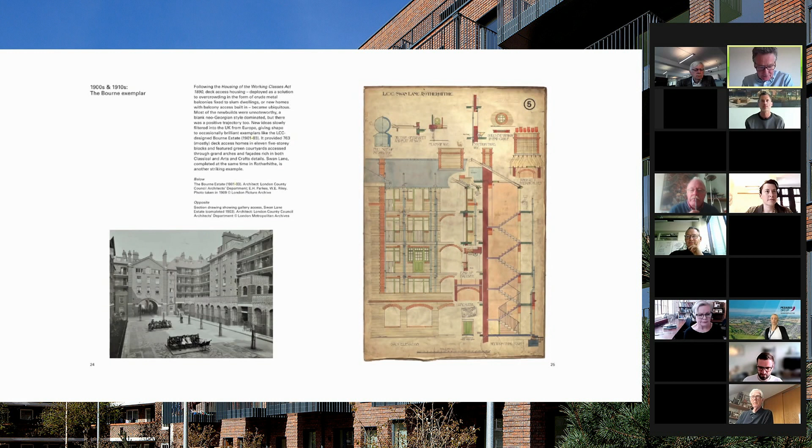Again, top left, you've got J.J. Burnet's housing for the Glasgow Workmen's Dwelling Company on Rotten Row in 1892. And then this is the Bourne estate. That's going to come up later as one of our modern case studies, but here's the original Bourne estate. Again, most of you will know it if you're in London, and very easy and a great pleasure to visit. One of the most celebrated deck access schemes from the early 20th century. And on the right, you've got another of those, Swan Lane Estate in Rotherhithe, this beautiful construction drawing of it.

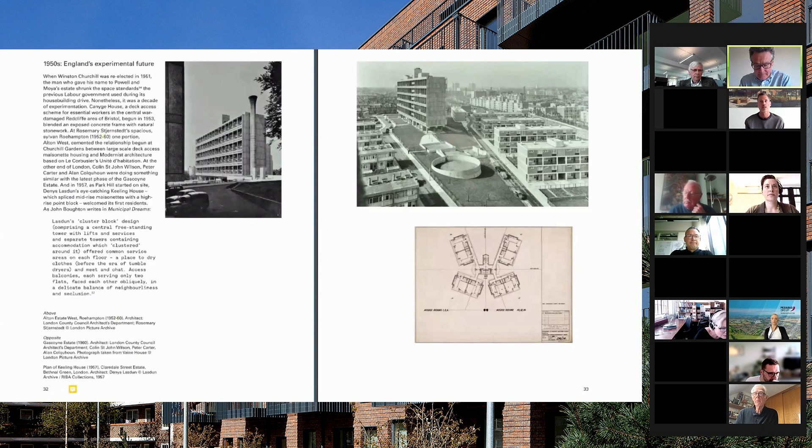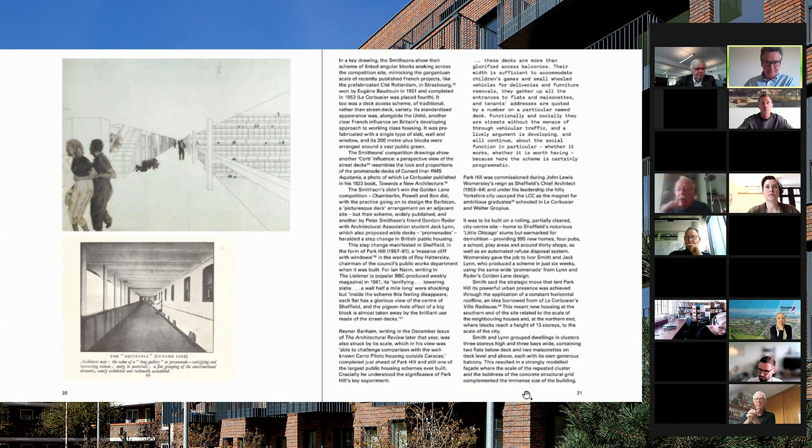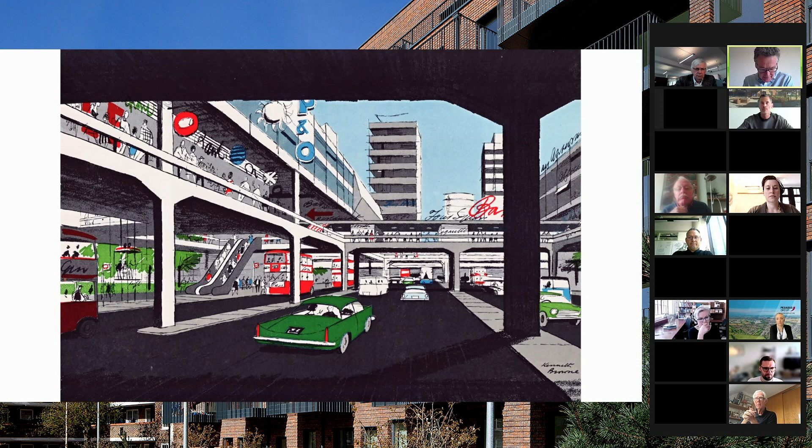And this is from Colin Buchanan's very influential 1963 government report, Traffic in Towns, which was reprinted as a Penguin paperback. So hugely important in shaping Britain's towns and cities in the post-war period by advocating the separation of people and cars. And the illustrator Kenneth Browne here gave form to the book's most extreme case study, reimagining London's Fitzrovia as a layer cake of walkways and decks with a dizzying armature of multi-lane motorways and service roads.

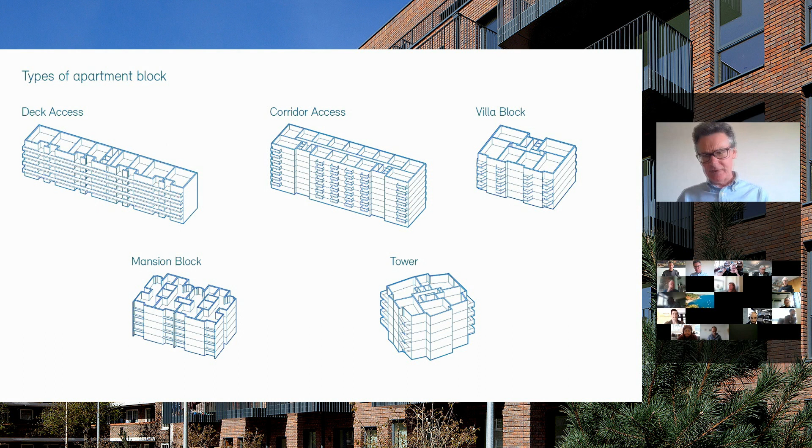Villa blocks, by that we mean blocks standing in space with windows all around. And mansion blocks, my personal favorite, and some of you have heard me talk about mansion blocks at other events, traditionally having paired flats off a central staircase, so every flat went from front to back, exactly as modern dual aspect does. Virtually impossible to do today economically because of the requirement for universal lift access. And therefore, we tend to do a lot of buildings which are kind of an amalgam of villa and mansion blocks with maybe 4 to 6 flats per floor. And of course, towers, which are now a dominant housing form in London and prominent in other cities such as Manchester, and the subject for a different talk on a different day, I think.

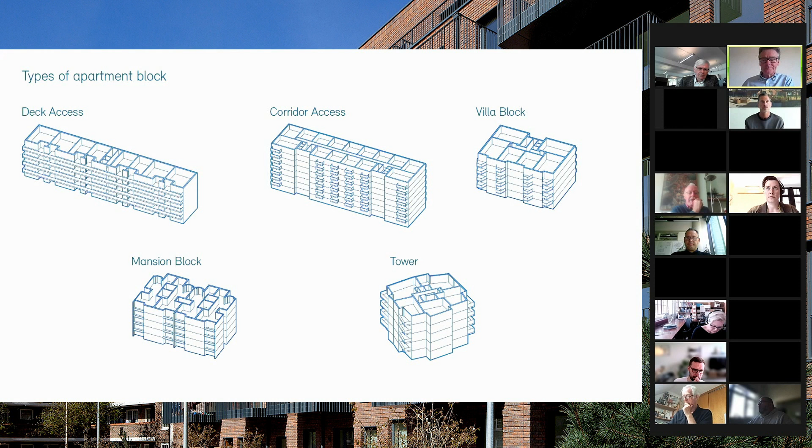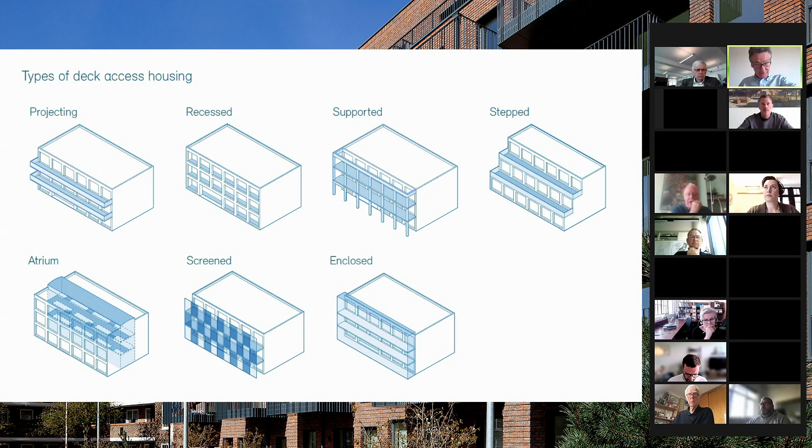Stepped decks, a popular form in the post-war period, but also some really interesting new examples in our case studies. And then on the bottom row, you've got some more specialist subcategories. The atrium type, where 2 parallel blocks are brought very close together with a narrow courtyard, usually, but not always, with a roof over it. Screened decks that are semi-enclosed, and then some decks that are fully enclosed with glazing, which trigger a whole different set of technical challenges.

What are the benefits? I have to reach for the book here to just summarize, and then we'll talk about some of the challenges. So the benefits of deck access, some obvious, some less so: you get homes, often every home in a scheme, having its own front door to, quote, the street and the sky, with an enhanced sense of personal identity that comes with that, and often a threshold and front door area which lends itself to visible personalization through personal belongings and planting and so on.

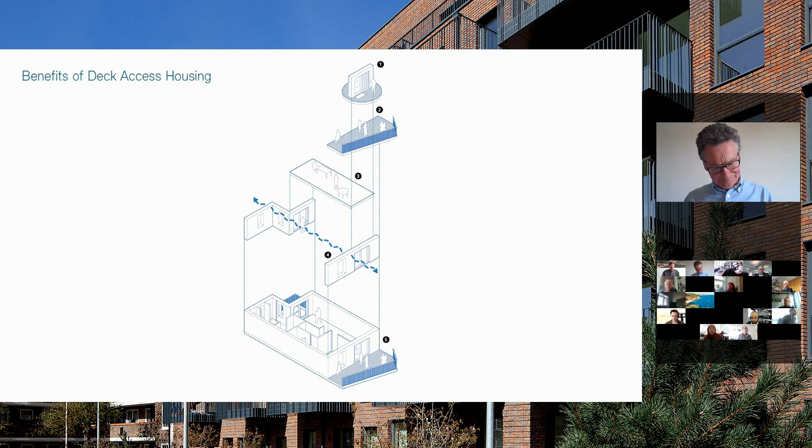Decks offer potential as social spaces for meeting neighbours. They offer scope for innovative open plan apartment layouts, maximising the effective use of space. Dual aspect homes offer cross ventilation, daylight from both sides, and a variety of outlook. Decks minimise internal common spaces with a potential reduction in cost, particularly management costs and the energy of heating and lighting such spaces. And by bringing all or most of the common areas into the open air, they have potential health benefits. What are the challenges?

There are many. Noise nuisance generated by neighbours passing on the deck, particularly if there are a lot of neighbours passing. Poor design or poor construction can also lead to direct noise transfer through the structure. If large balconies are also provided, which are required, of course, in London, then there's a risk of too much shading, too much overshadowing, and difficulties achieving decent levels of daylight, even though you're getting it from two directions. You need careful detailed design to manage exposure to wind and rain, and this is one reason that we don't really recommend deck access for more than mid-rise.

And to me, mid-rise is the sweet spot, 7 stories, but you might go to 9. There are obviously quite a few deck access schemes around, so 9 to 10 stories, but it can get pretty windy up there, not to mention the possible problems of vertigo and of antisocial behaviour, people chucking things off decks. Fire safety imposes a complex set of limitations on the length and detailing of decks and the homes they serve, although open-air decks are inherently safer than enclosed common parts. Refuse management is another limitation on the length of decks.

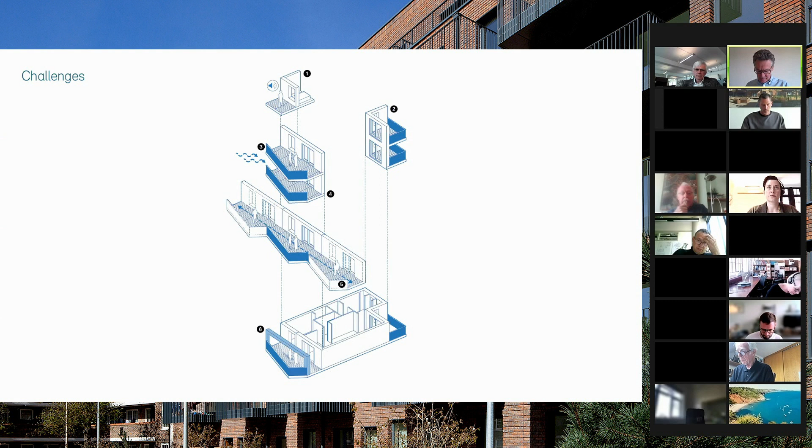I've mentioned noise nuisance, but there's also visual privacy, of course, from people passing. And therefore, we tend not to recommend the deck side as suitable for the principal bedroom or the principal outlook from living rooms. But there are some successful exceptions to that. So these are just some of the challenges, alongside some really quite intricate technical things about how you route pipes and wires and drainage and so on, all of which are covered in detail in our practical guide.

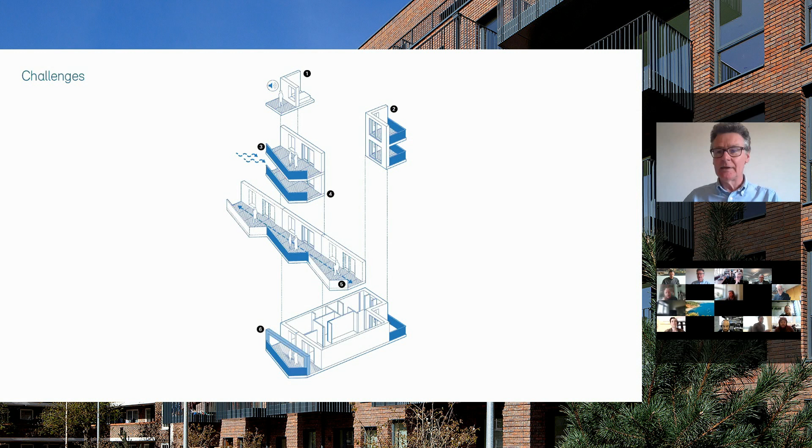Now, what I was going to do, I'm going to do very quickly, because I've been talking for longer than I'd planned. I hope the history was interesting, but it took a little time to get through that. Our book, as I say, has about 35 case studies, a few more in the UK than in Europe. I was going to show you just a very few of those. But typically what you get for each of the UK case studies is 2 double spreads, with basic description, data, and photographs on the first spread. And on the second spread, you get location and then typical and ground floor plans and sections.

As I said, because of time, I'm just going to whiz through these rather than dwell on them, because I want... Scott, are we going to... Is it 1:15 we're going to? Is that right? I think the session's till 1, but I mean, if we go up to 1 now, and then... Yeah, I think I need to speed up, so I'll do that.

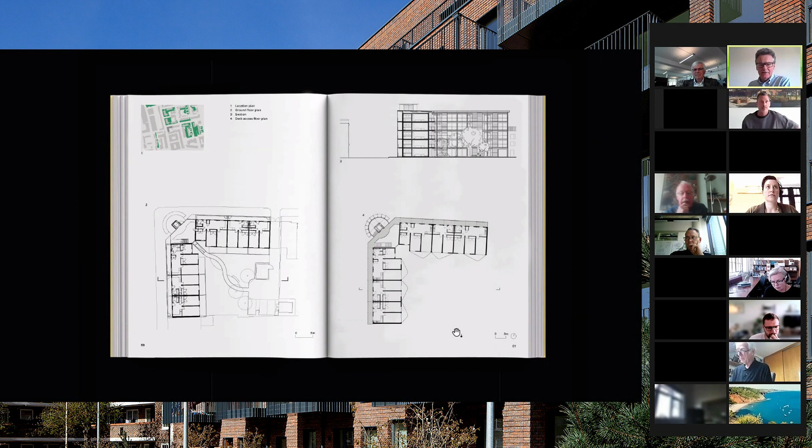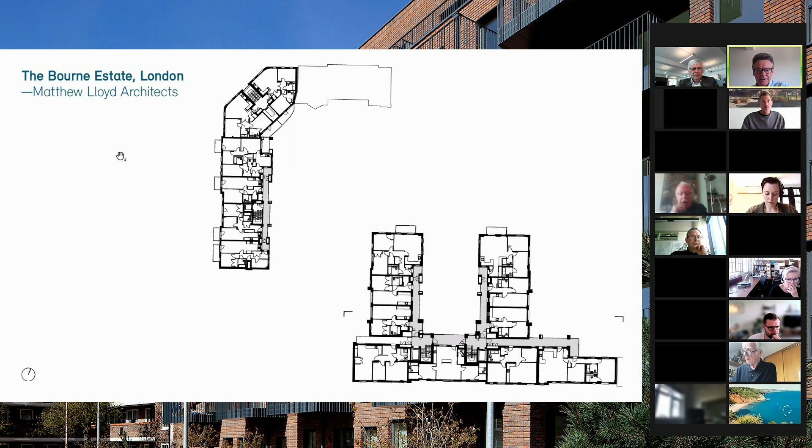So I just selected a few of these to show you, give you a bit of the range and character. The Bourne Estate I've mentioned as a historic precedent, but here we see the really splendid new insertions made to that by Matthew Lloyd Architects, which are beautifully detailed, with a wonderful sense of materiality. One thing that struck me about them, that may have changed now, you see how empty the decks were in the photographs, and they were very empty when I went there.

Contrast that with the decks from the old housing that this is integrated with, which are packed full of plants and have been completely taken over as people's personal space. And I wonder whether the reason for that difference is the new housing is being more rigorously policed. And of course, we're now in an era where we're much more conscious of fire safety than we were.

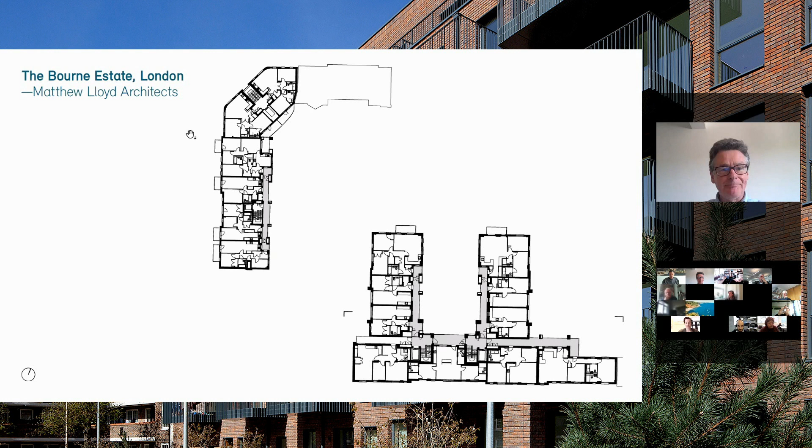So that's one of the classic dilemmas of how to design and use the deck, and how you keep a clear means of escape whilst allowing space for personalisation and planting. This is one of our own schemes, Colby Lodge, which is what we call third age housing for older people. And interestingly, I think 4 of the UK case studies, quite a high proportion, are older people's housing. And here the deck is very much a social space.

The decks are very wide. They have kitchen dining rooms looking onto them. There's a sort of feature staircase, as well as the kind of utilitarian stair and lift core. And they've been found to work extraordinarily well in heat waves. The shade on the deck has been very popular.

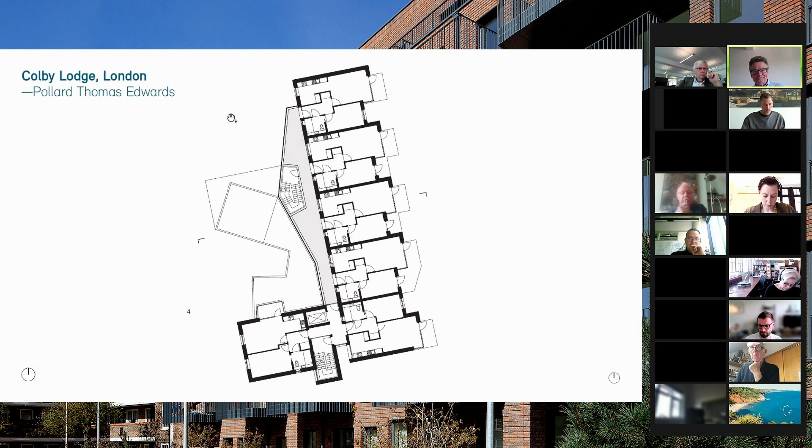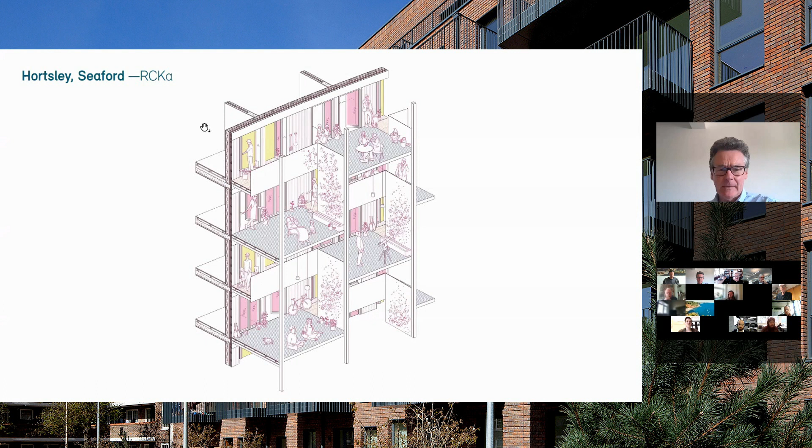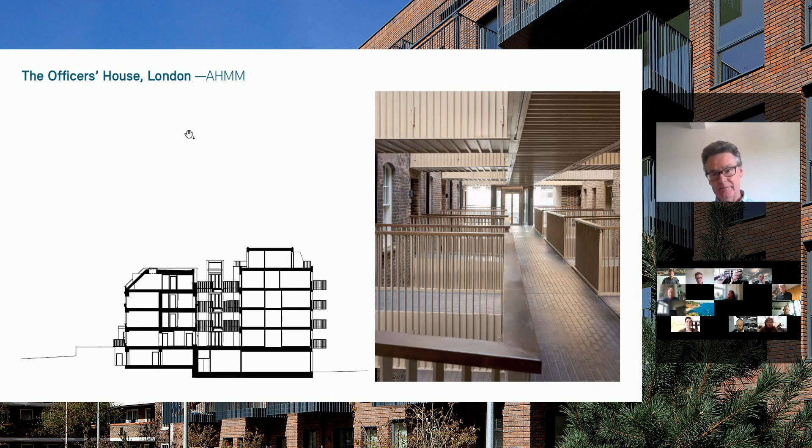A retrofit scheme, AHMM. So in the section you can see restored historic building on the left, new block on the right, very narrow courtyard, atrium, in this case not covered, and the deck, instead of being attached to one side or the other, becomes a central feature with bridges. You can see that very clearly in this plan, which is a really nice way, both of animating the space, but also pulling the deck away to give people more privacy, which they need because there are bedrooms in this case looking into that narrow atrium.

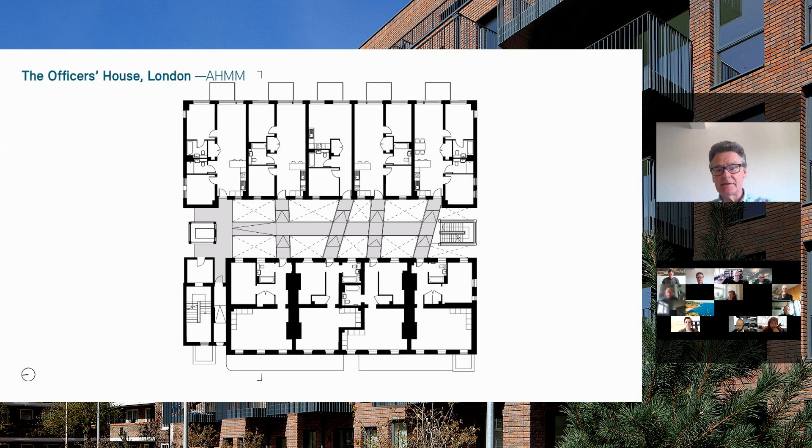And I think our final UK example for today, something very, very different aesthetically. The only UK scheme that really thinks it's on the continent, House for Artists, which also exploits that feature of the regularity of deck access housing, which I referred to in relation to modular building. It exploits that to show different ways in which the interior of homes, and indeed homes and workspaces, because these are artist studios as well, could be adapted over time to serve different kinds of community and different ways of using.

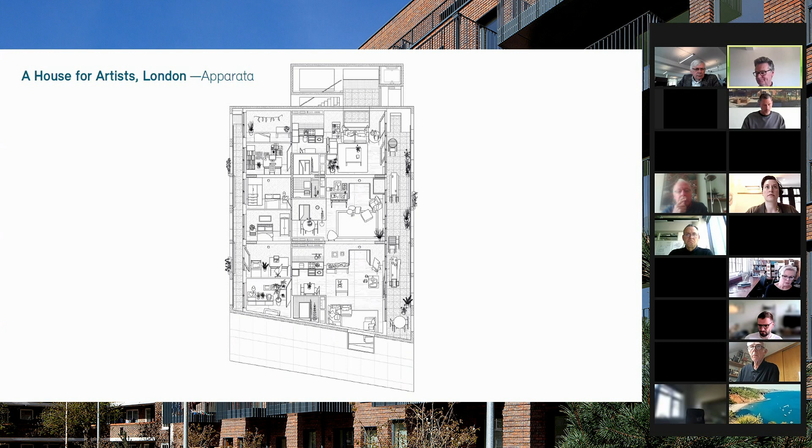Now, the headline I wanted to leave you with on these case studies is that the UK stuff is, for the most part, quite small schemes. They're very crafted. They're very careful. They're very polite. They're very people orientated, and they are excellent. But they're quite tame compared to what has been happening as a kind of continuous, unbroken line on the continent of Europe, where modernism never died, and you get much more experimental, bold, and at times slightly barmy architecture. And I'm going to show just a very few examples.

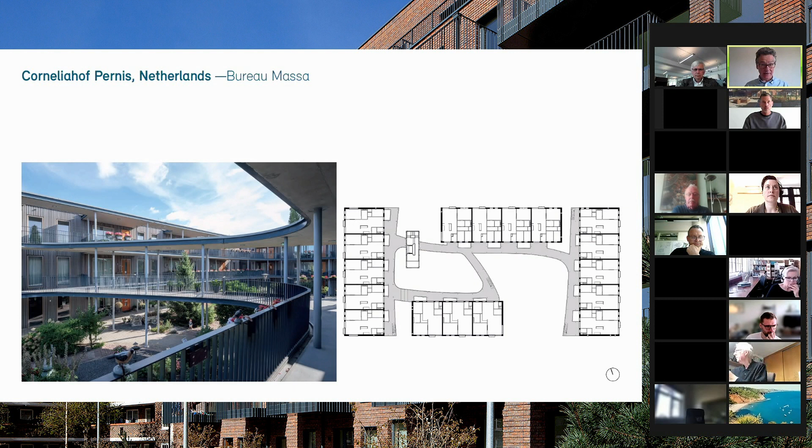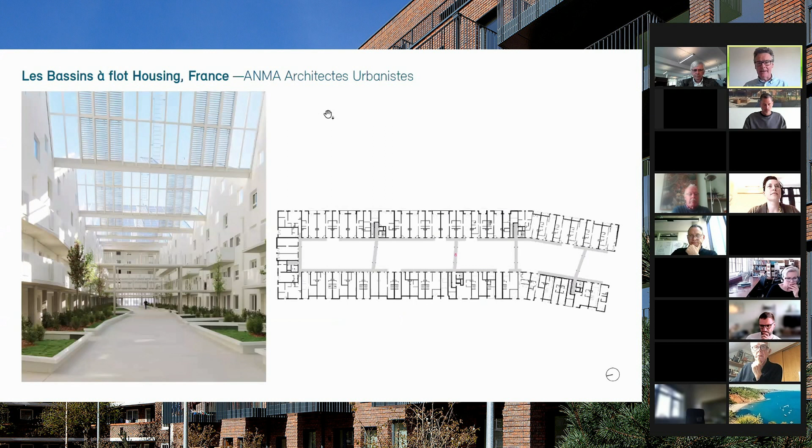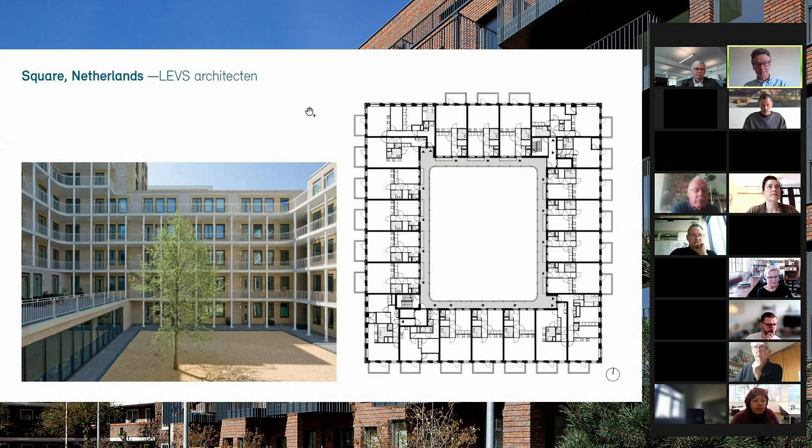This is Bordeaux, a complete big street of housing, which is completely covered over. So a very large atrium street with homes looking into it. And here in the Netherlands, probably of our continental examples, this is the one that could be in Britain, that looks most kind of British in its careful, restrained rationalism. But a really good example of how to make a complete urban block with deck access.

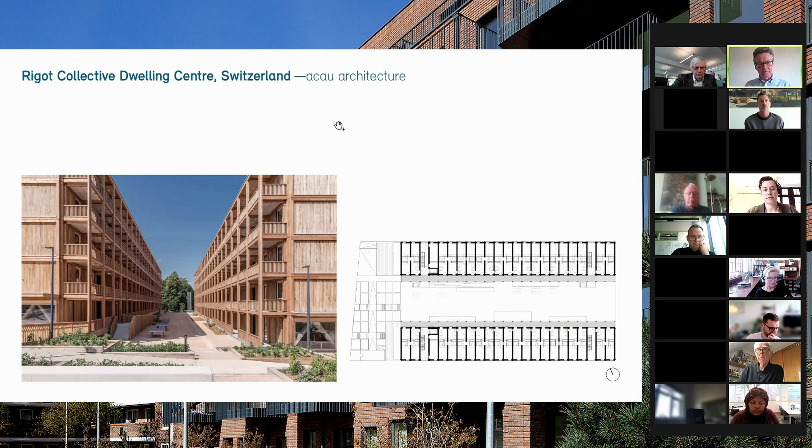And here, prefabrication and timber. So a lot of the continental schemes use timber, which I'm afraid is very hard to do, in fact, pretty much impossible above 4 stories in Britain. But here you can see that done in a very full-on way, a single material cladding and structure of the whole scheme. And this is a retrofit that's been widely published. You might know of a post-war building that's stripped back to its frame, reclad with decks and balconies all around.

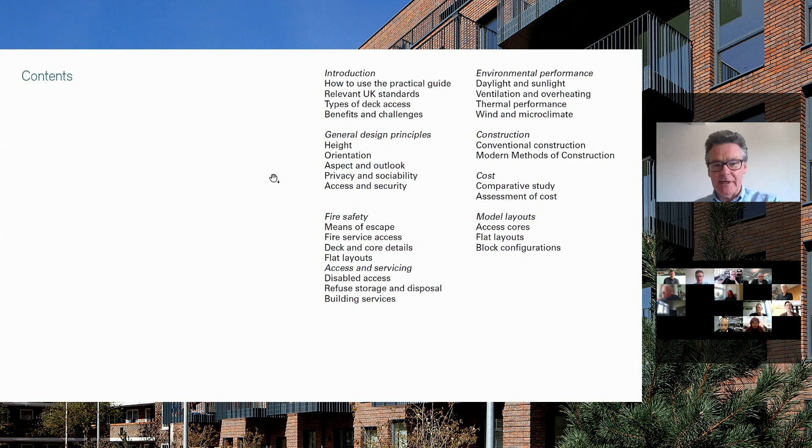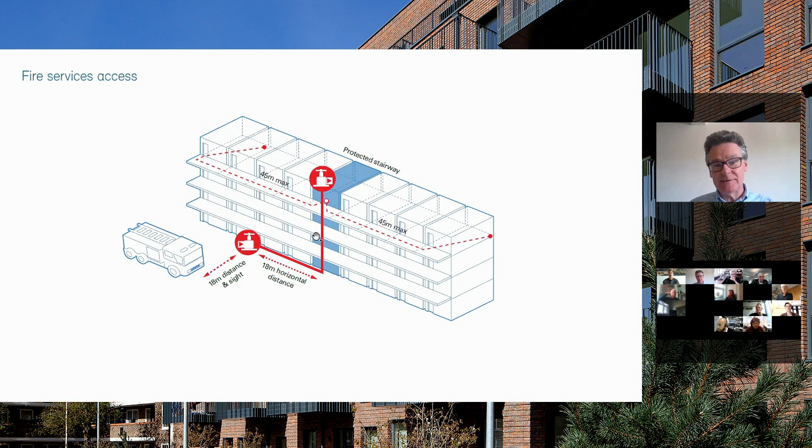So my final bit is just to tell you, not to show you our practical guide, but to tell you what's in it. So basically, this should answer all of your practical, technical, regulatory questions about how to do deck access in Britain at the moment, because rules change. So I'm very grateful to my colleagues in what we call Knowledge Hub at Pollard Thomas Edwards, who were largely responsible for putting this together. So, for example, you get lots of very clear diagrams like this one that explain to you how the length and design of decks is limited by fire service access in the case of this diagram.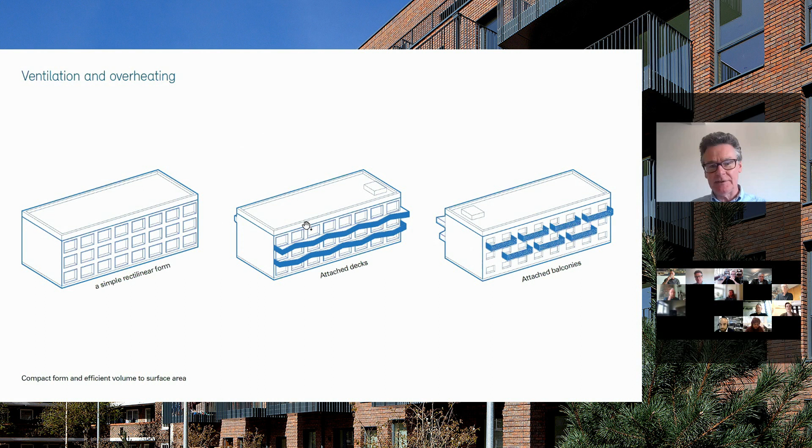You get an explanation of the environmental performance of deck access housing, including strategies for controlling ventilation and overheating. And there's a cost section contributed by Martin Arnold Associates, Quantity Surveyors. And the headline from that is that, because we're quite often told by developer clients who are reluctant, I think for cultural reasons, to do deck access, that it's too expensive. The conclusion of this, which was an elemental cost study taking two different blocks of flats, on the left deck access, on the right a mansion block layout, exactly the same amount of net accommodation.

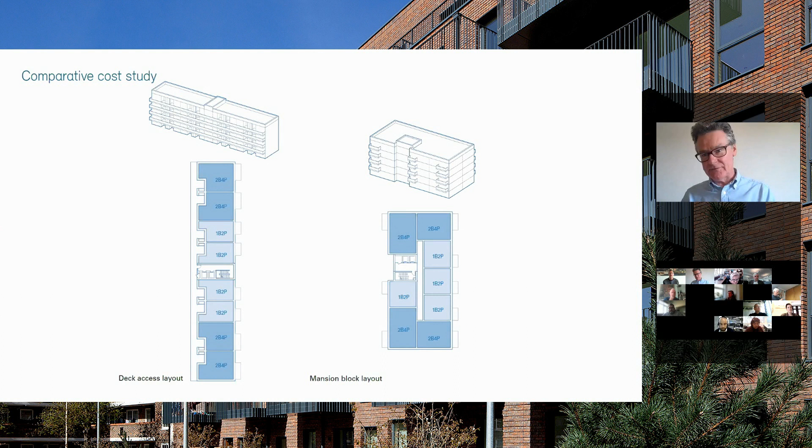What do they cost? They cost almost exactly the same. To be truthful, the deck access was about 2% more expensive. And also, to be truthful, that implies a fairly simple form of deck and enclosure. So some of the more elaborate ones, for example, recessed behind a separate brick facade, would add further cost. But it's not the kind of runaway difference in cost that some would have you believe. We have model layouts, different ways to do the circulation, flat types, and whole block configurations to help you design your very own deck access scheme. So good luck with that.

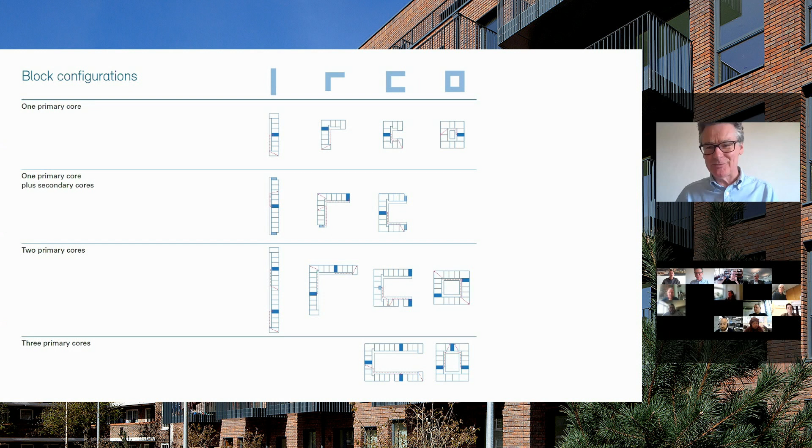Thank you very much indeed. I'm sorry if I've overrun, Scott, and I will stop there. Andrew, I don't think you've overrun. I think you've done it perfectly in time. If you're able to stay for 10 minutes, it'd be great to take some questions. We've got quite a few in the chat. And Robert, I will just ask for the third poll to go up now.

But essentially, I thought it was really inspiring seeing the different examples from the historic to the contemporary and also the continental, where they do change quite a bit. And you can see where we've become a bit more humanistic, I think, in our approach, which is quite nice. And there's quite a few nice comments from someone who said that their deck they used as a stage as a child to sing a Eurovision song and some memories. So it's quite interesting. Just a few questions from the chat.

John Duffy asked about the defensible space. I'm sure it's in the book, probably more on the practical side, but how do you redefine the linear decks to give a sense of ownership to each of the fronting homes? I think some of the examples showed that, but it'd be great to get your view on that.

Yes, certainly. So I think the first point to make is that in the UK now, planning requirements, particularly in London, will mean that you're going to be limiting the number of homes on any particular level of deck, typically to 8. I think you can argue for more, but as a maximum. So already you've got a relatively small number, and hopefully you know your neighbours.